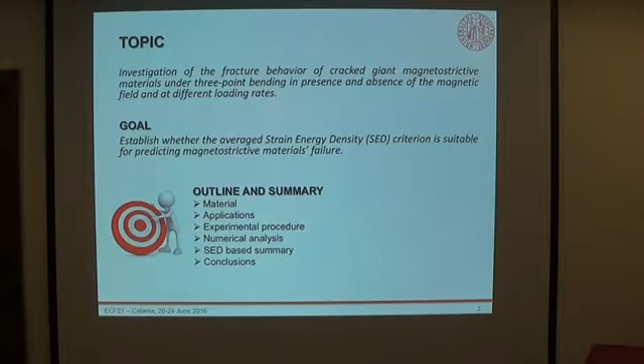The condition considered was 3-point bending, and the effect of the presence and absence of the magnetic field and different loading rates was considered. The final goal was to establish whether the average strain energy density criterion is suitable for predicting magnetostrictive materials' failure. A brief introduction on the studied material.

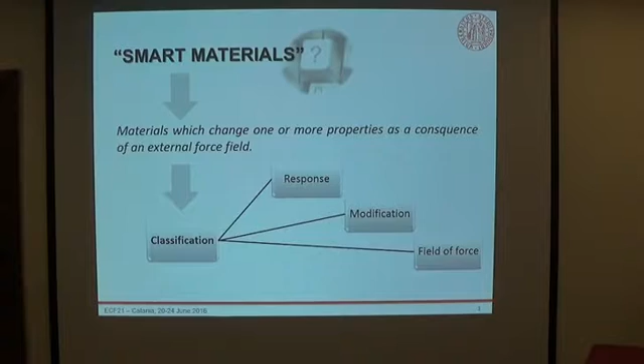Magnetostrictive materials are part of the category of smart materials, which are materials that change one or more properties as a consequence of an external force field. In the case of magnetostrictive materials, the external force field involved is magnetic and the modification is geometrical.

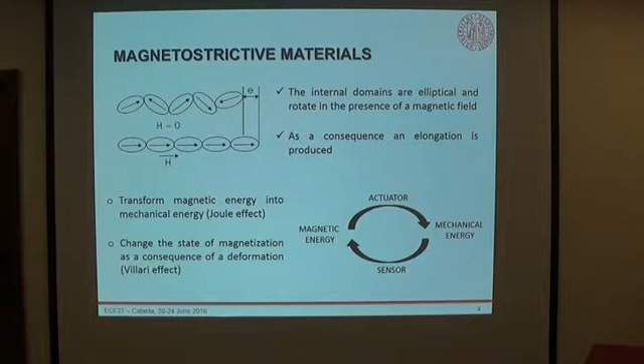The internal domains of the material are elliptical and they rotate and stretch in the presence of a magnetic field. As a consequence, an elongation or restriction is produced.

These materials find many applications in the automotive industry, in avionics, and in robotics, both as sensors and actuators.

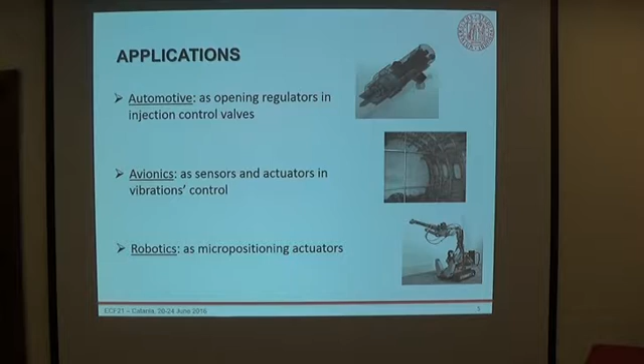Among giant magnetostrictive materials, we consider the commercially named Terfenol-D, which is provided by Etrema. This material is an alloy of iron and rare earths, terbium and dysprosium.

We chose to study this material because it is one of the most commonly adopted in applications, due to its extremely short reaction time, high saturation level, and high Young's modulus. Despite this, the material is really brittle, and once again this is a motivation for the study.

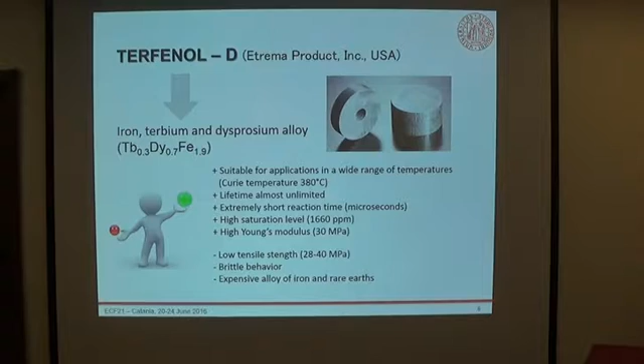In our previous study, we considered the same material and presented a set of 12 specimens made out of Terfenol-D, loaded under 3-point bending. On that occasion, the energy release rate criterion was considered.

It had been found that Terfenol-D shows a decrease in the fracture load in the presence of a magnetic field. This behavior was justified by the increase of the energy release rate with increasing magnetic field, as it's possible to see in this plot.

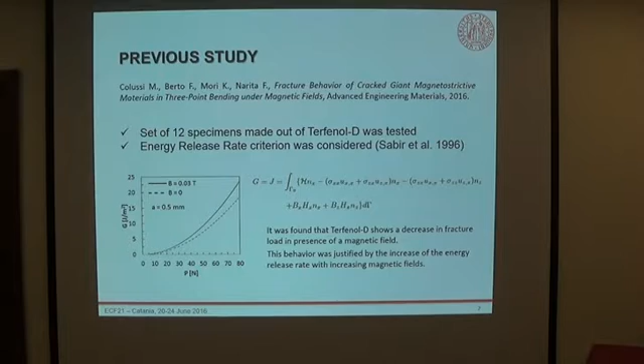In the present study, we present a new data set of specimens tested under mode 1 loading condition, 3-point bending. The testing apparatus and the specimen are presented here.

A uniform magnetic field with induction of 0.03 Tesla was applied in the longitudinal direction. Also, different loading rates were considered: 0.05, 0.5, and 3 Newton per second. Moreover, the strain energy density criterion was considered instead of the energy release rate criterion.

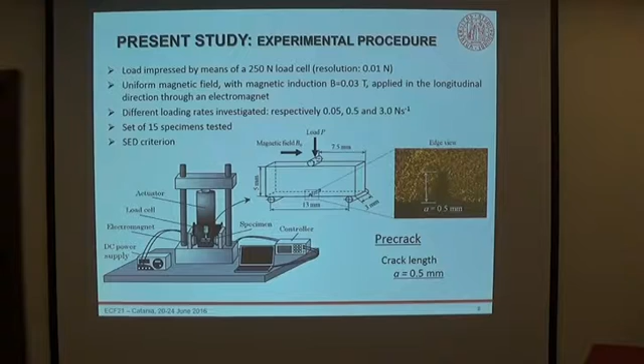It has been found that in the presence of the magnetic field, we have a reduction in the resistance. This reduction was about 13%, 9%, and 7%, reducing the loading rate from 3 to 0.05, 0.5 Newton per second.

Moreover, it has been found a further reduction in the resistance reducing the loading rate from 3 to 0.5 Newton per second, while a good agreement was found by reducing furthermore the loading rate.

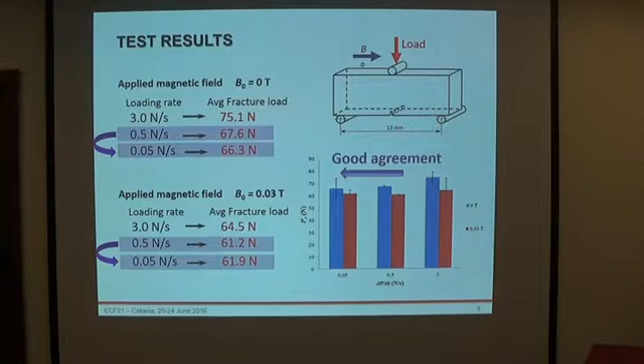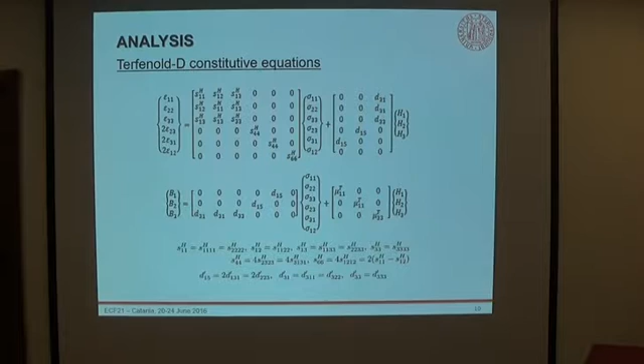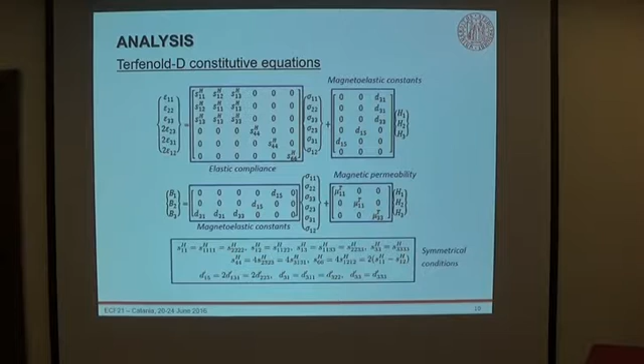Next, I talk about the analysis. Here are outlined the constitutive equations of the material. We can see an orthotropic material, and also the stress dependence on the magnetic field.

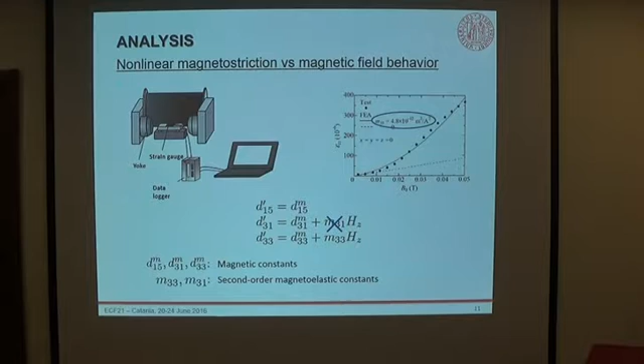Moreover, being the magnetostriction of this material non-linearly dependent on the magnetic field, we introduced also a second-order magnetoelastic constant in the longitudinal direction.

Two-dimensional finite element models were considered and the assumption of plane stress was made. This is because specimens were really thin, only 3 millimeters.

Because the basic equations of magnetostrictive materials are formally equivalent to those of piezoelectric materials, we considered coupled field analysis, piezomagnetic, and the magnetic field was introduced by a voltage difference.

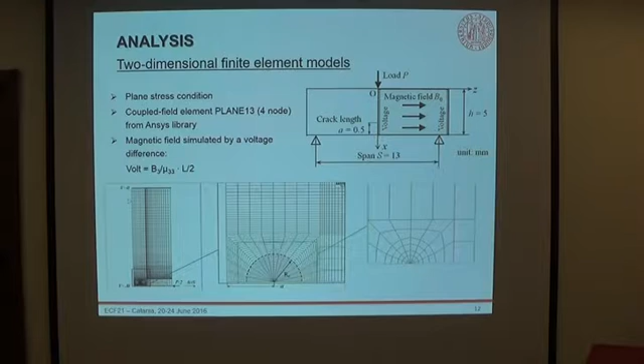According to the average strain energy density criterion as formalized by Lazzarin, brittle failure occurs when the strain energy density averaged in a specific control volume, that in the case of cracks is circular and centered at the crack tip, reaches a critical value.

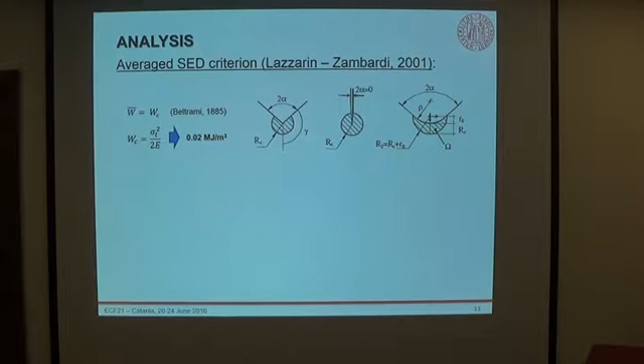This critical value can be computed according to Beltrami with this formula, and introducing in this formula the average value of the tensile stress and the Young's modulus provided by the material supplier, we can find this critical energy, 0.02 megajoule over cubic meter.

Then, by computing with the finite element models the strain energy density, and by plotting this energy as a function of the radius of the control volume in the presence and without the magnetic field at the corresponding critical measured load, it is possible to find an intersection.

This means that at the critical condition, the material is characterized by an energy averaged in this control volume, which is dependent on the ratio between the magnetic field and the external load.

Then, once the control volume dimension is fixed, it is possible to compute and plot the energy versus external load. Also in this case, we can see that in the presence of a magnetic field, the energy is always higher, and this justifies the fact that

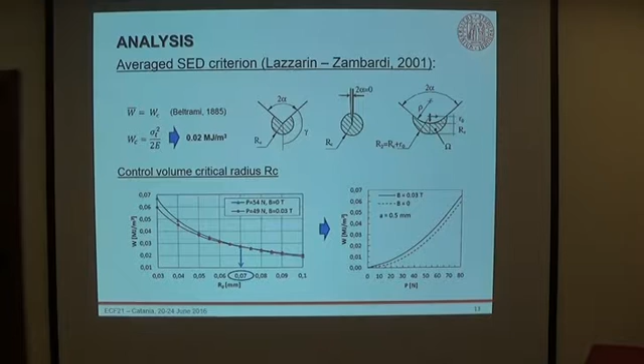specimens fail at a lower load in the presence of a non-zero magnetic field. Then, repeating this procedure for each loading rate, it is possible to find different intersections.

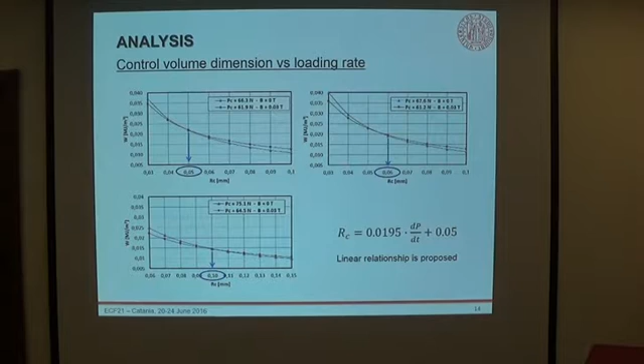A good agreement of the trend of this intersection versus the loading rate to a linear model has been found, and so this simple linear relationship is proposed.

Finally, using this relationship, it has been possible to summarize all experimental data into a narrow scatter band ranging from 0.8 to 1.2 in terms of the square root of the computed energy over the critical energy.

We think that this could be a good result for an engineer who needs a criterion to establish the fracture of this material.

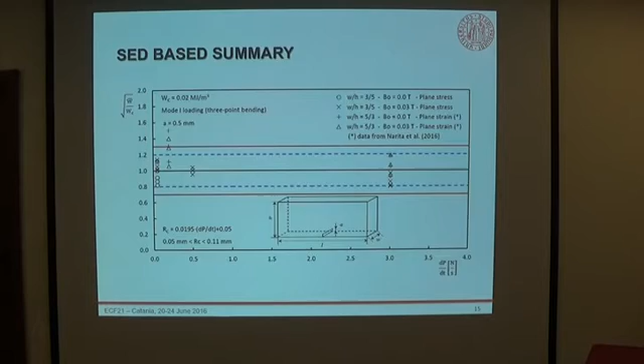In conclusion, under mode 1 loading condition, the material definitely shows a decrease in fracture load in the presence of a magnetic field. The fracture load is affected by the loading rate, and the SED criterion seems able to capture this behavior. Points that remain open are mixed mode and the extension to other materials.

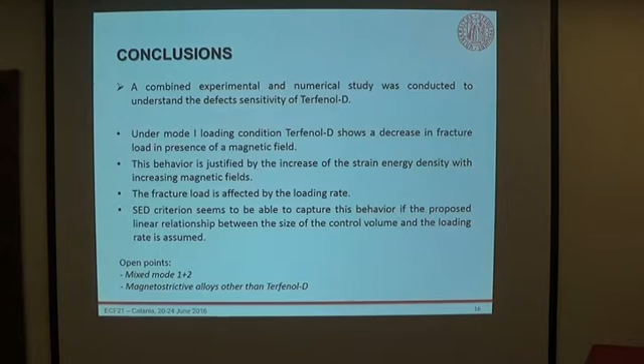We are now working on both points, and we are studying another material named Galfenol, which is a gallium and iron alloy. With reference to mixed mode, we just finished testing a few days ago, but we had not time to perform the analysis, so I can only give you a preview.